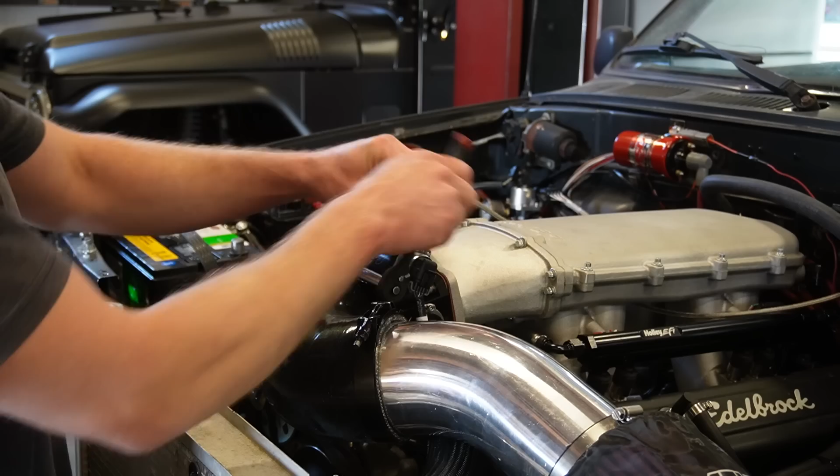Well, I'll show you the leaks. I guess I kind of wiped it up, but right along here, there's the main coolant passage that crosses over, and I'm thinking it's coming from the threads up and out in between the gasket here. So what I'm going to do is seal, actually I might seal all these up. These inner ones go into the center of the engine where there's oil, and those can leak as well. So I might just seal all the bolts up, but we're gonna have to do them one at a time because we don't want to loosen that gasket up at all. So we'll pull one out, clean it all, seal it all, and retorque it.

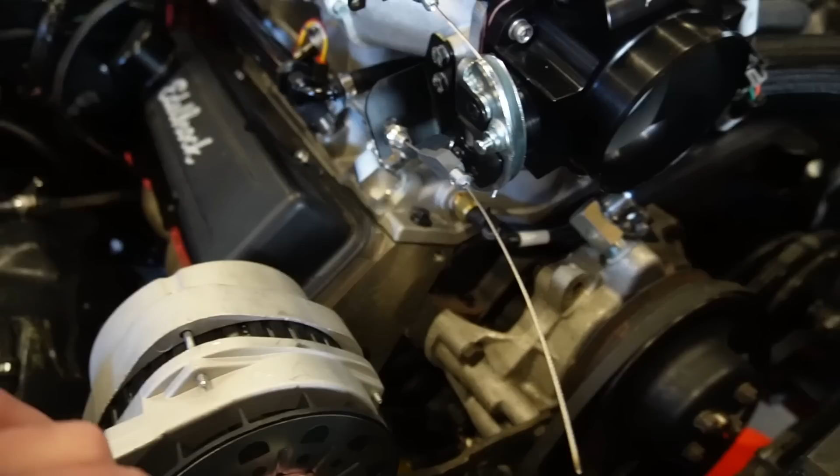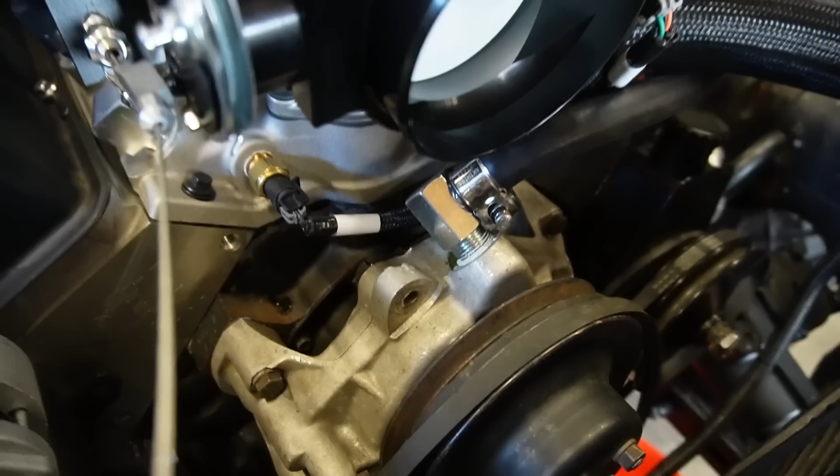And then the main problem I got to figure out is this 90 here is leaking, and I can't tighten it anymore. You can see I already had to notch out the back of the water pump just to get it there. If I do one more turn, I'm not sure I can really cut that enough. So I'm gonna have to find some way to get some sealant to hold on this 90. So we'll pull that out, clean that, reseal that up with something, maybe some thread tape or something, I don't know, to get that to seal up. And then we'll throw it all back together and see if that fixes our leaks.

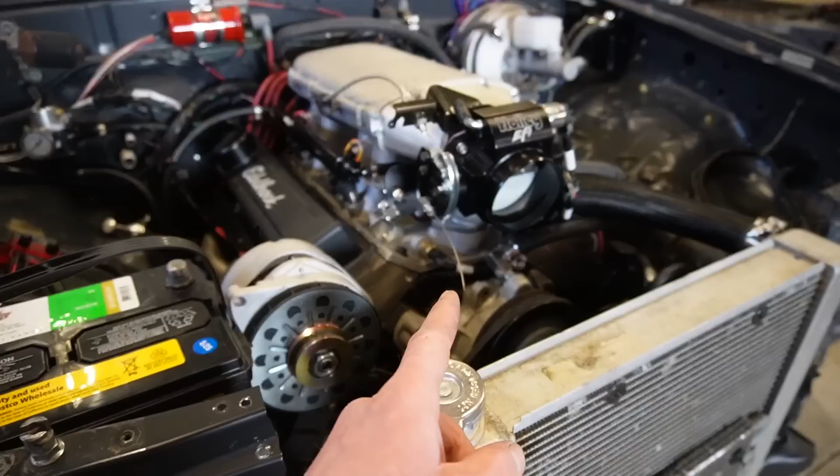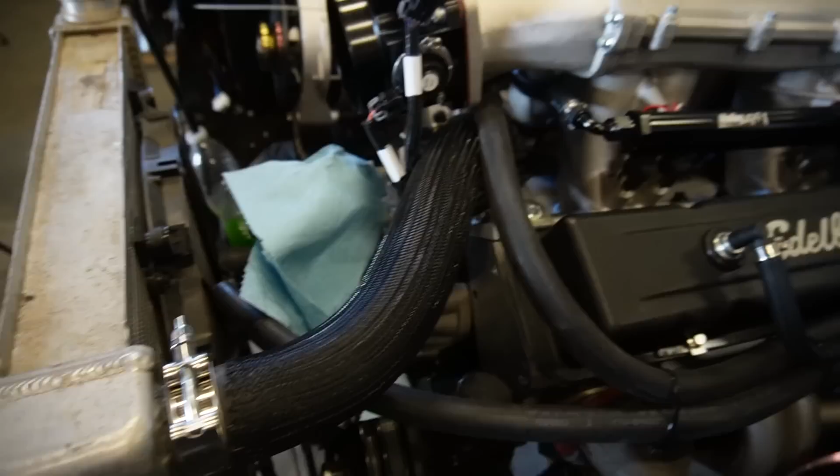All right, we got that fitting out. We're waiting for some new sealant. I'm checking these bolts, and these holes go all the way into the head, into the coolant passage. So I'm like 99% sure if we seal those up, that's gonna work, because when I pulled the bolt out, there was coolant on it. You can still see some of the coolant in the threads there. So I'm pretty dang sure that is our leak. So we'll seal those up and see if that'll work.

Well, I bought some other thread sealant that I'm going to try on these intake manifold bolts. I'm still waiting for that, so once that shows up, we'll get on that. What I want to do now is get started on mounting the radiator and building a battery box. I've had a ton of questions and requests about how I go about making parts. I basically go from cardboard to CAD, and then from CAD I cut it out on my plasma table. So I'm gonna show you guys exactly how I build my parts. Like I said, I start with cardboard, I get it as close as I can, and then I get it onto CAD, and then we'll get that on the plasma table, we'll cut it out, and usually it's pretty dang close.

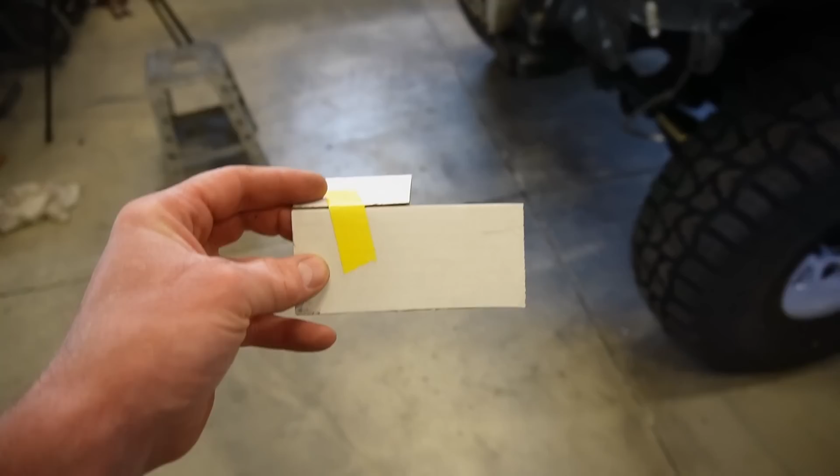So here's my pieces for the bottom mount. This is basically gonna go and bolt onto these bolts here. These are gonna double as my bumper mounts, but it's gonna be just perfectly fine to double that up. So that's gonna go there. We're gonna have a piece coming up.

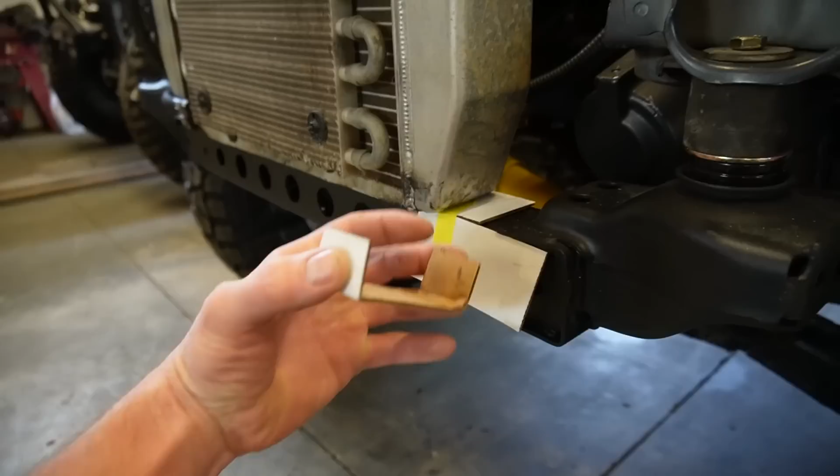We're gonna bend that, and then I'm just gonna make basically a U-strap, kind of like that, to go around the bottom of the radiator. I got some like 1/16 inch thick rubber that I'm gonna put inside there, so it's not rattling around metal to metal, but that's gonna kind of hold that like that.

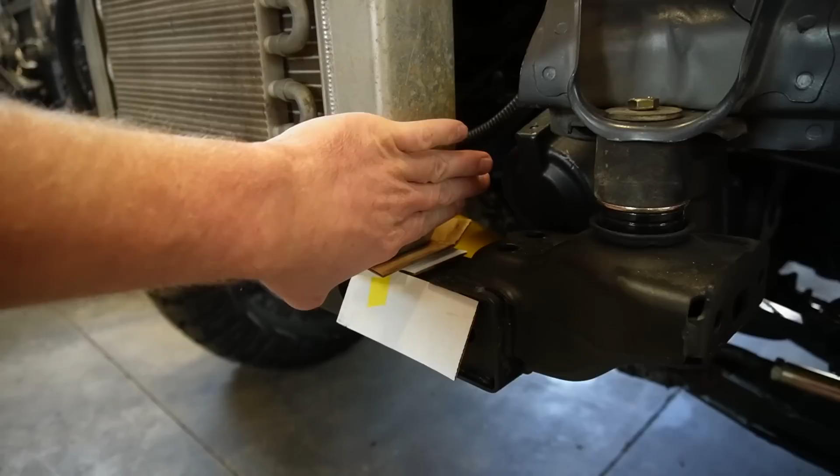And then I'm gonna plate up here, basically enclose all that so it kind of follows the contour of that radiator here. It is kind of angled down here, so we're going to follow that contour and kind of just close the end in.

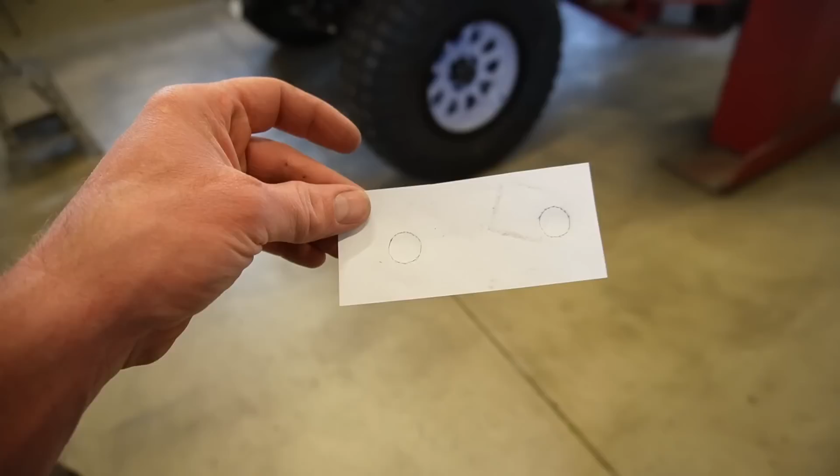What I like to use to get the bolt holes in the right location is I just use paper, and then you can take your fingernail and kind of run it into the hole, and then you can see it, and then I just mark that out with a little pen, and then I'll measure all that and get that into CAD.

All right, we got all this drawn up. That's the lower mount. That will bolt on to the frame like I said, and then that's the little strap. We'll bend that up at a 90 to kind of hold the radiator, and then that piece is going to close in the end, and then this is going to be the upper mount.

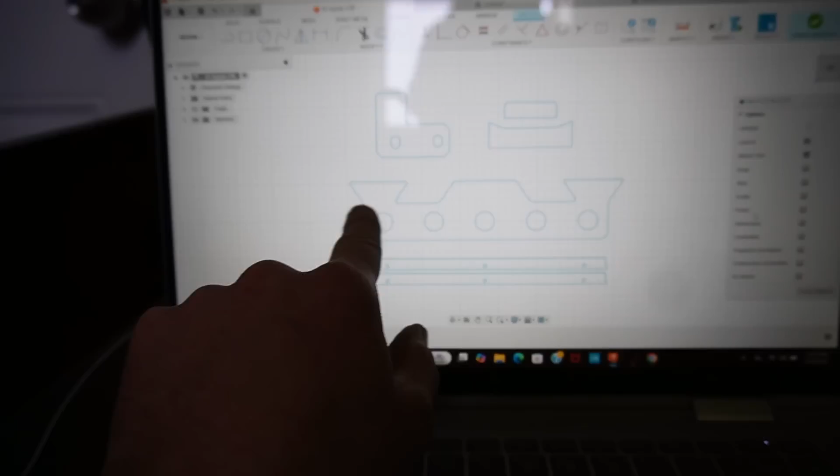So these two pieces here with the holes are going to weld to the bottom of this and bolt onto the radiator. This is going to sit on top of the radiator, and then I'll have a tube that runs here and then bends down to the core support. So this will act as a mount for the radiator, and it will complete that core support because it is cut for the radiator. And then I do have some holes in it. I'll probably throw some dimple dies in it, give it some strength and some looks. So that should work pretty good.

Now there are a few different ways you can get all this into CAD. What I like to do is just measure. You can take a picture of your part, get it into CAD, and then trace over it. I don't find that as accurate as just measuring, so I just measure everything by hand, and then it's usually pretty close that way.

So I'm gonna get all this cut out of, I'll probably go 14 gauge on this. It doesn't need to be thick, and then with that upper mount with the holes in it, doing dimple dies actually strengthens that steel quite a bit. So 14 gauge is gonna be plenty for that.

So we'll get all that cut, and then I do still have the file for the battery box I built for the FJ40. It's the same size battery, so I'm just gonna copy that box because it turned out really good. So I'm gonna copy that. I'm gonna cut that out. I think I did that at 1/8 inch. We'll cut that out, get that all bent up and welded together, and then we can get it mounted up to the truck.

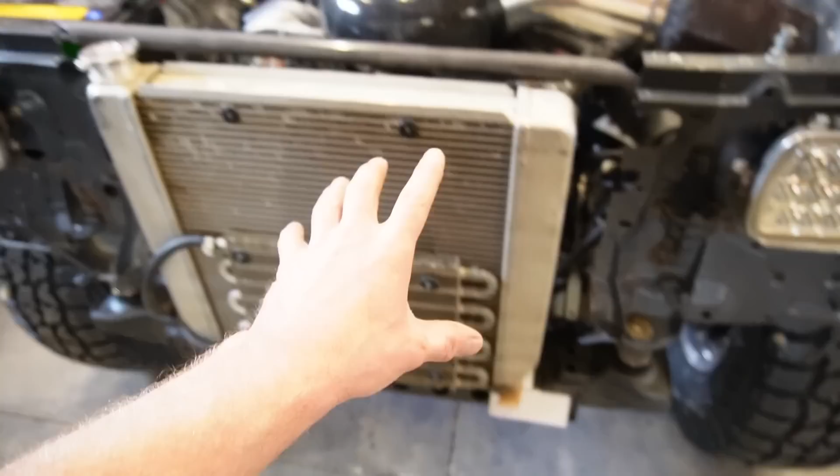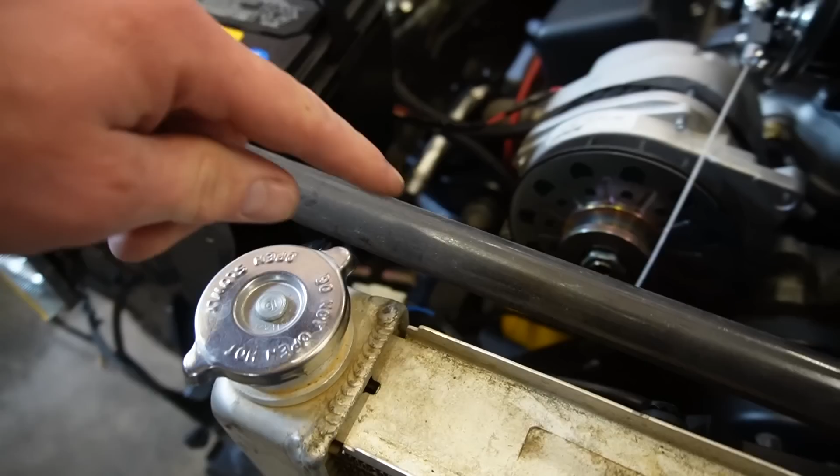All right, instead of cutting all this stuff first, what I think I need to do is bend this tube, because I got 1-inch tube here, and we're gonna have to run it kind of right there, but you can see it's gonna hit the radiator cap. So what I need to do is kind of put a bend around that radiator cap and that little nipple there for the overflow. So I'm gonna bend this first and see where it lands and where it clears, and then I'll have to do my measuring for that top plate here.

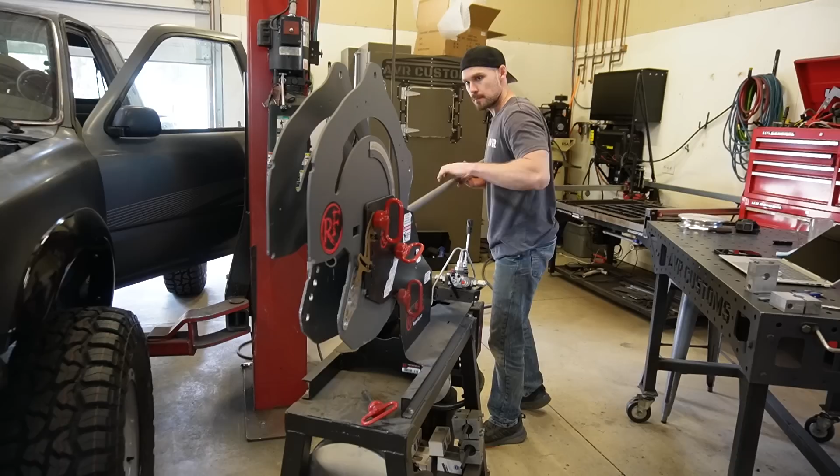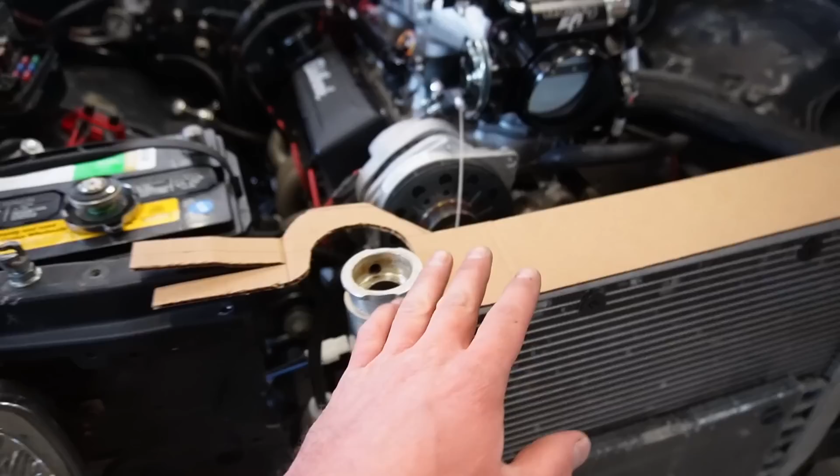Well, I decided to scratch the tube idea. I couldn't get these two bends close enough to where I could still have a plate like right here on this edge that looks good. So I decided I'm just gonna do a plate top. So it's gonna be kind of like that, and then it's gonna bend up, bolt in there, and then I'll fill that little gap in there, and then weld on the mounts off the bottom here to bolt it to the radiator, and then we'll cut those lower mounts and we'll see how it all works out. I think it'll work this way.

All right, after lots of measuring, I got the CAD file ready to go. So we'll get that ready. We'll throw on some 14 gauge on the plasma table, cut it out, and see how it looks.

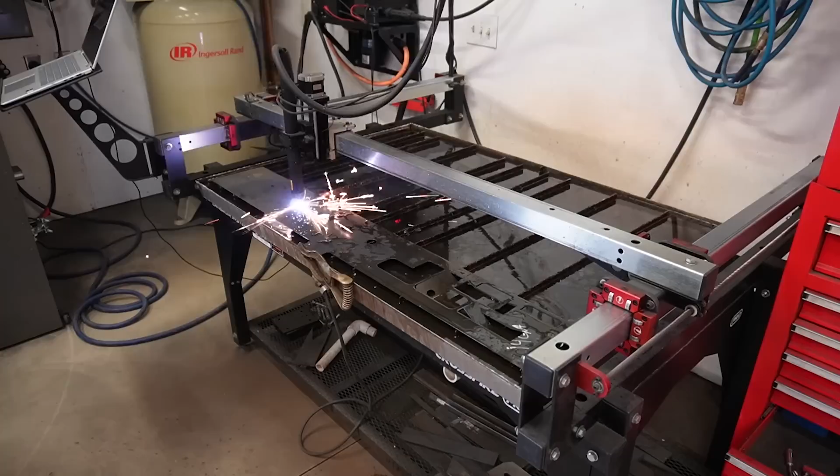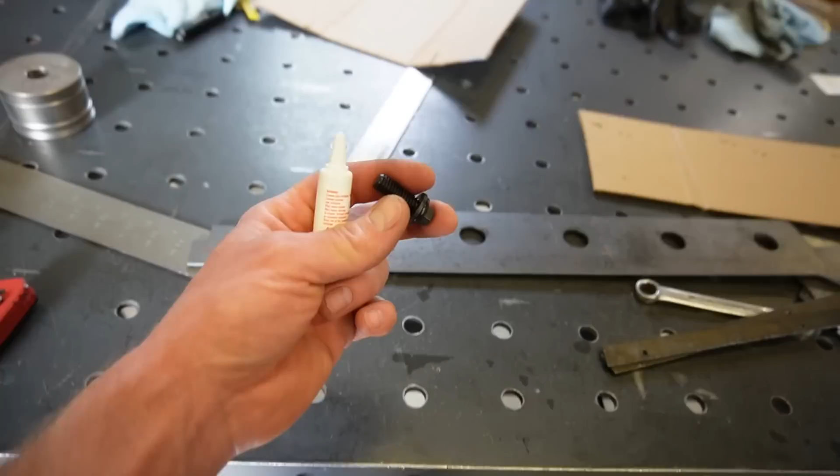Well, we got our parts cut, but we just got our thread sealant in. I'm gonna try this high temp from Permatex. It's the 59214. So we'll get some on these bolts. Like I said, I think I'm just gonna seal all the intake bolts, because I think the back ones are actually okay, but these middle ones I know go into the oil galley in the middle of the engine.

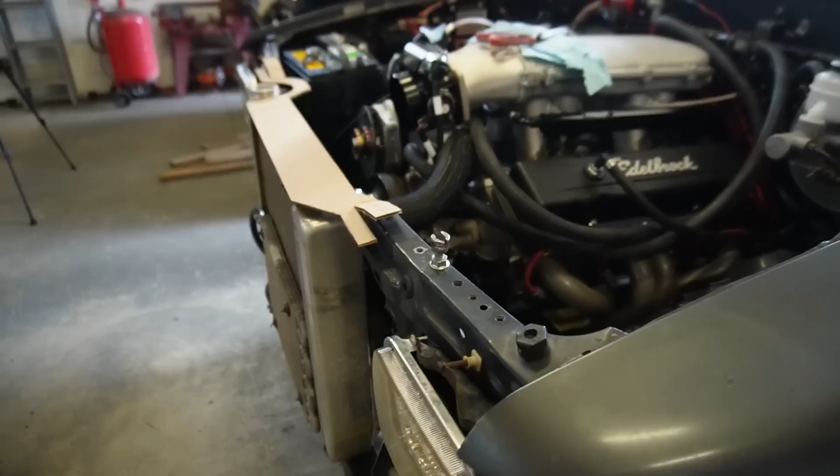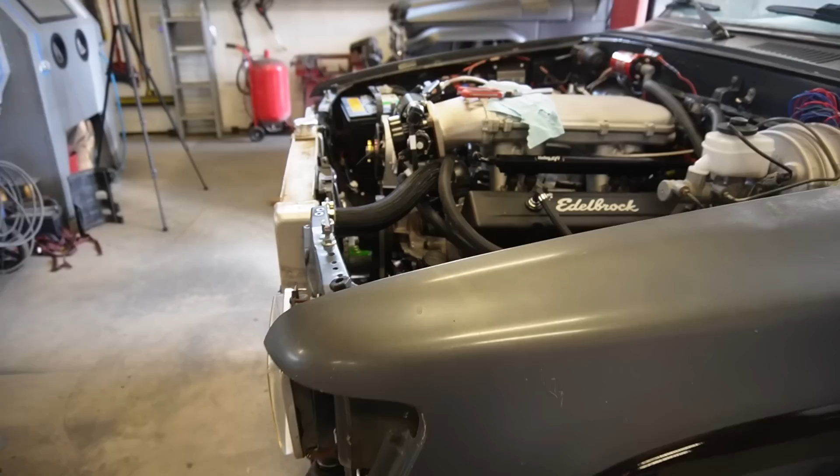So let's seal these up, and we got this already sealed up right there. I just did thread tape for now. I think that'll work. If not, we'll throw some of that on it, but let's get this all sealed up. Well, we're all sealed up. Now these bolts were completely covered in coolant, so I'm pretty dang positive that's where the leak was coming from. So either way, we're good to go there.

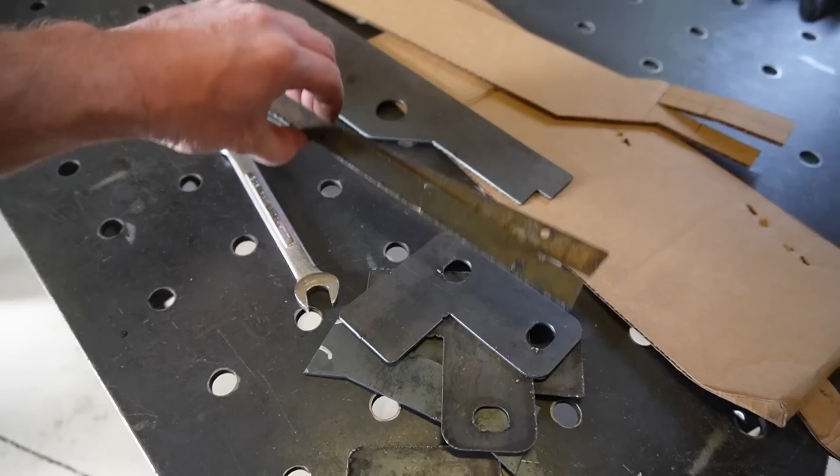Let's jump on these mounts. I'm gonna start with the lower, kind of get that lower set where we want it. And then this is the upper piece. Turned out pretty sweet. I think it'll look good once we do our dimple dies in these holes. And then like I said, these are gonna weld on underneath, and we're gonna use those holes to bolt it to the radiator right there. So that should work pretty good.

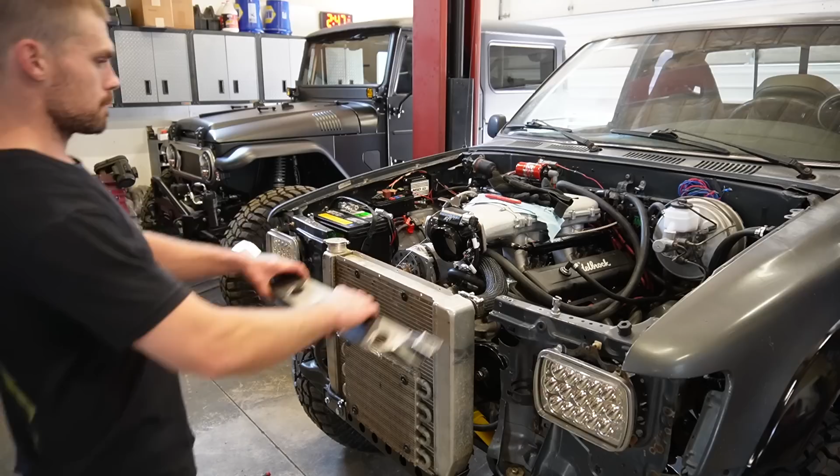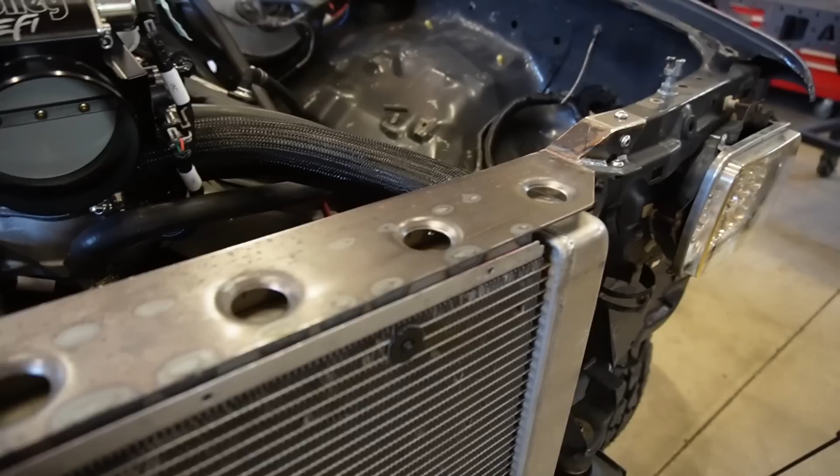Well, that actually turned out better than I thought. I actually think it looks better than if I were to go tube. I don't know, I like it, especially with the dimple dies and then how I tied it in here. I still got to trim it. It's sticking out a little bit here. I'll just bevel that down a little bit, but we are good to go.

These mounts, uppers and lowers, turned out perfect. And this upper really serves as 3 functions. It completes the core support, it's a radiator mount, and it looks good. So I'm stoked with it.

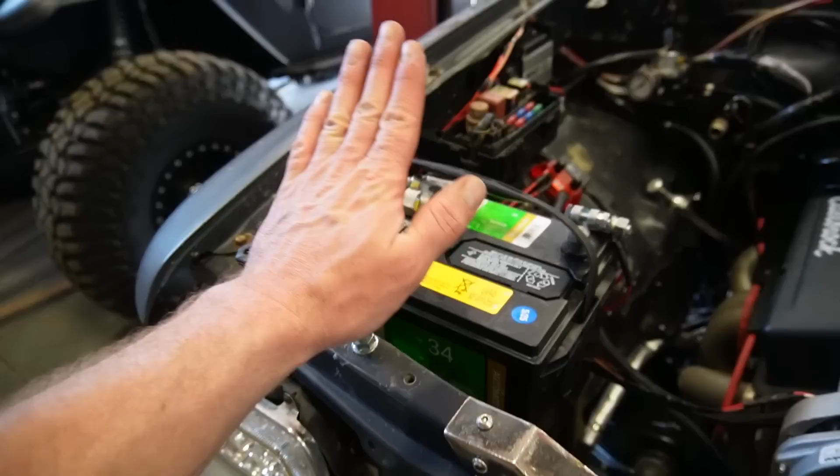Next, let's do battery box. So like I said, I already got the file on my computer for the battery box we built for the 40. Let's just copy that one. We'll bolt it right in. It should be pretty easy to get that set up.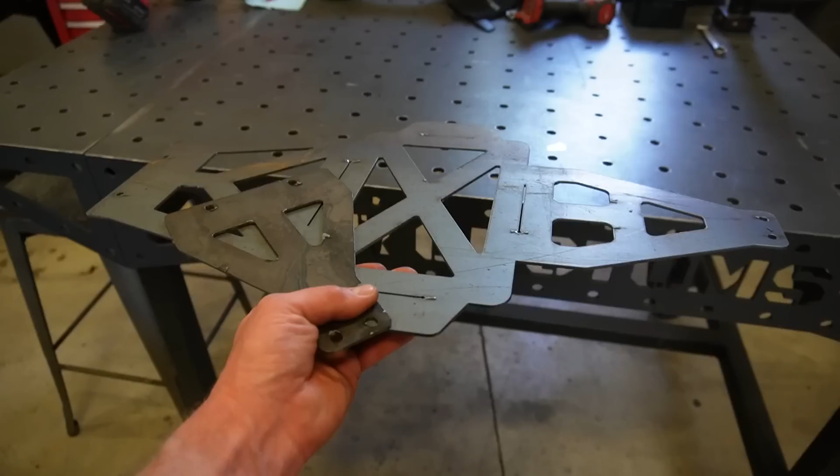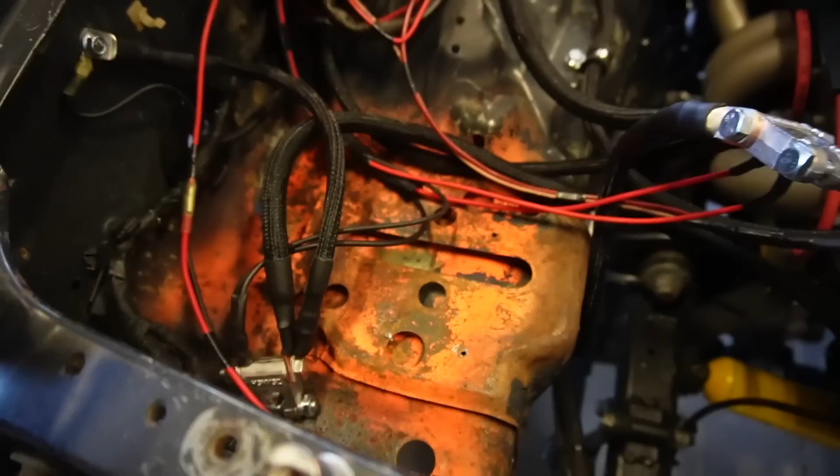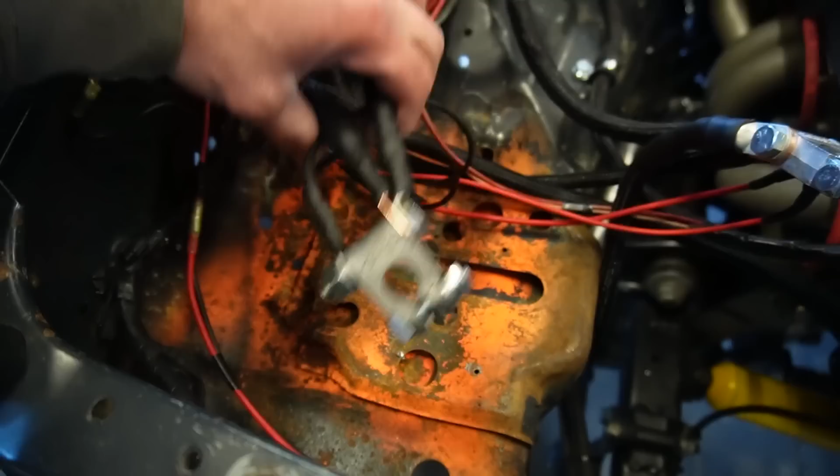Well, battery box is good to go. That turned out really nice. Now, I was just gonna kind of bolt it to the top of this old battery bottom tray thing, but my OCD got the best of me. It's a little rusted out, so I'm just gonna cut that thing out of there. Just a few spot welds, it's pretty easy, and then we'll be much better off, I think, without all that rust in there, and we'll just bolt that straight through the inner fender there, and we'll be set.

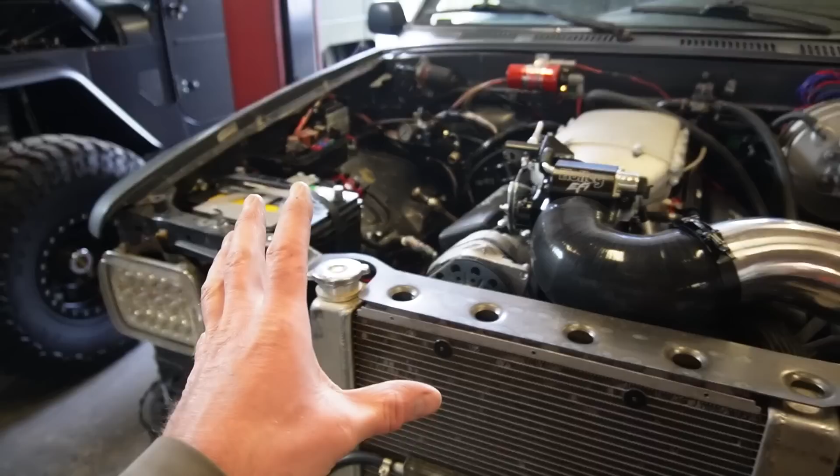Well, battery box is in, bolted in nice and snug. That is gonna work so perfect. So I'm trying to get everything done that we need to powder coat. And one other thing I want to do is I want to extend this intake out to get my filter more in this inner fender. And I think that'll just keep it away from the heat for one. And for two, it'll look a lot better.

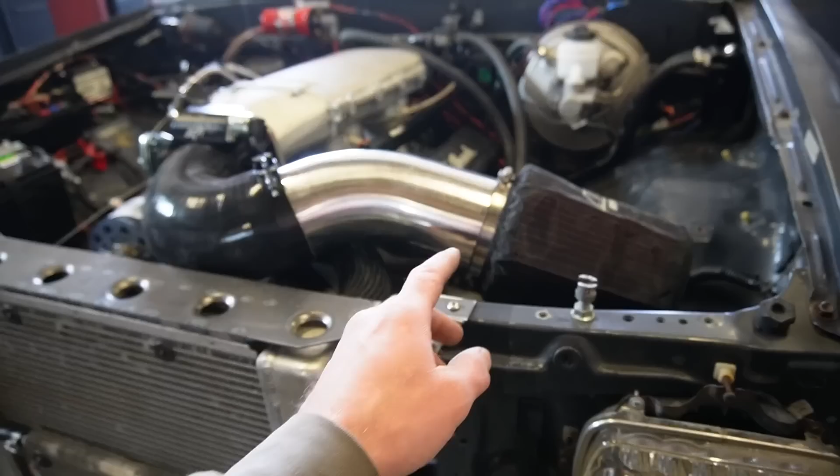So I got some more 4-inch straight. And hopefully we can get a decent weld on there. The rest of that welded pretty good, but I'm really not very good at welding aluminum. So we'll see how it goes, but I want to extend that out, and then we got to powder coat that intake pipe, the whole battery box. I think I'm gonna leave this and paint it the same color as the engine bay. That way it matches the whole core support, but these bottom mounts here can get powder coated black.

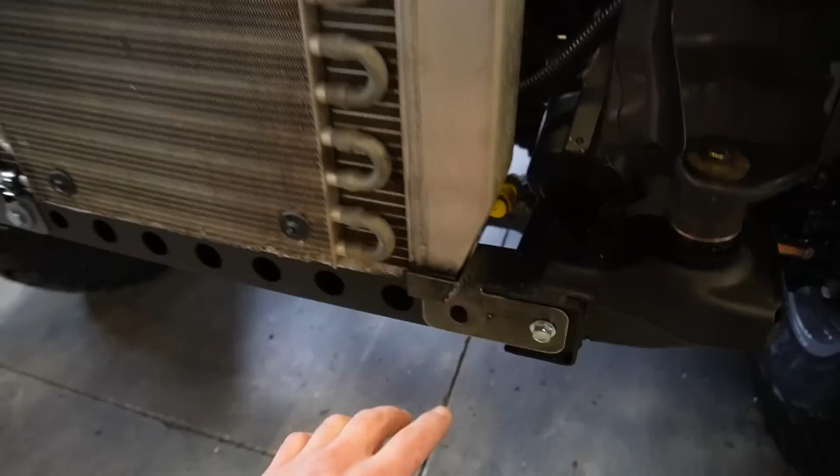And then I think there was a couple other things. Oh yeah, this bracket for the regulator needs to be powder coated, and maybe a couple other little things that we can powder coat. We'll do all that black and it'll look much better.

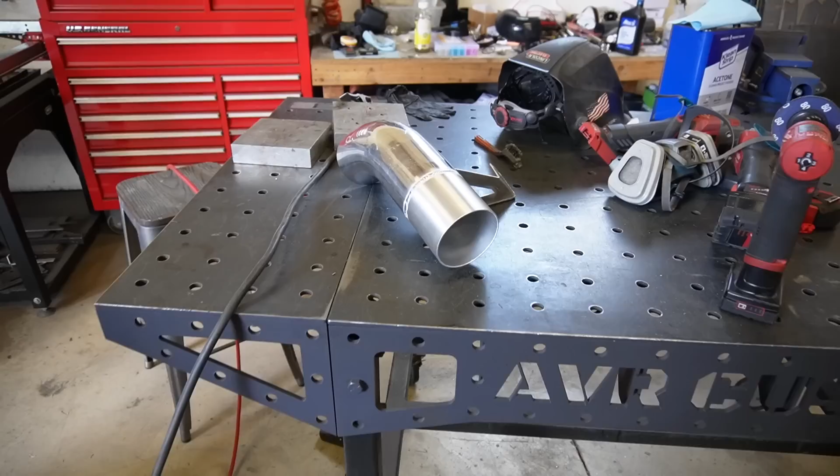Well, I don't know what's gotten into me, guys. I have struggled with aluminum every time I've ever welded in my life, and this one turned out, I mean, some of you probably don't think it looks that good, but I think it looks freaking amazing compared to what it usually looks like. It was effortless. It just, I don't know, it just welded. So we're good on intake there.

Now I'm gonna jump on some powder coat. So like I said, battery box, that intake, regulator mount, radiator mounts, and a couple other little things we got to powder coat.

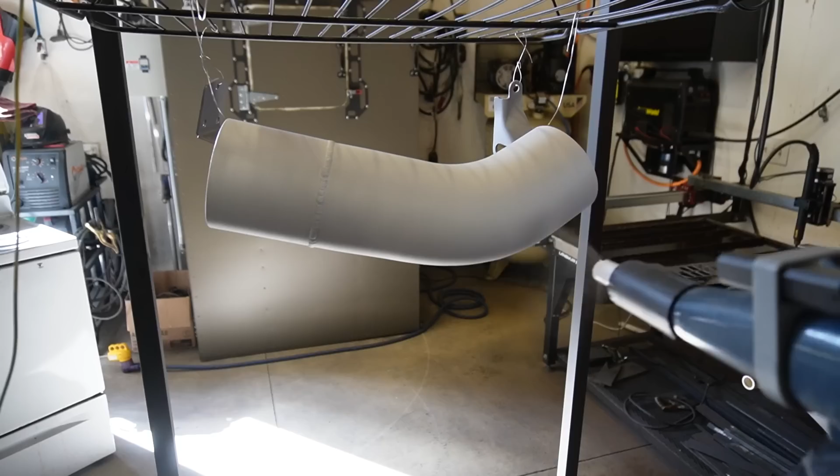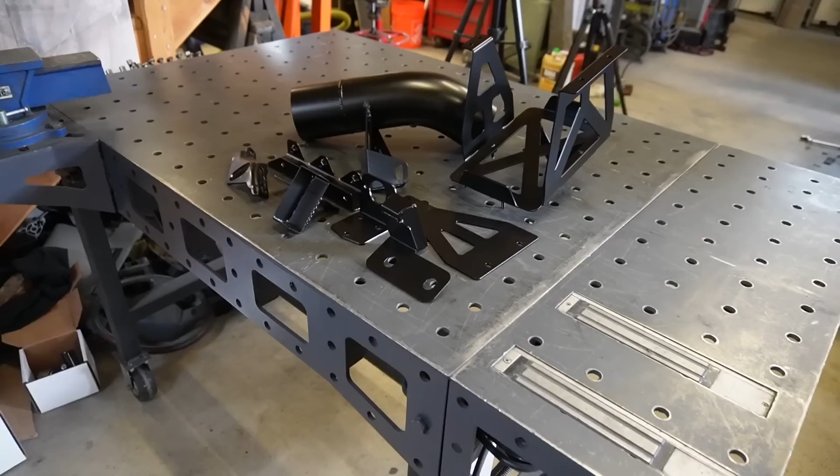Well, we're all done powder coating. These parts, like always, turned out really good. This is the stone black that I've been really using a lot lately from Prismatic Powders.

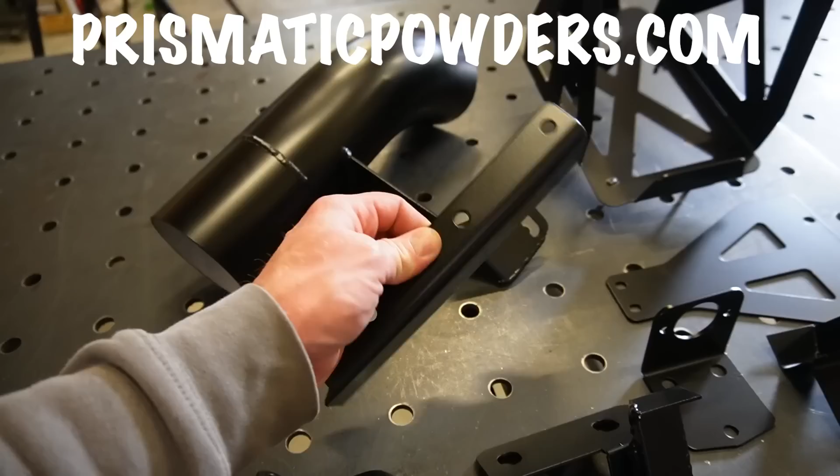Like I said, the stone black, it's kind of a matte black color. I mean, it's a really nice color. It's honestly one of my favorite powders. That's why I keep using it. But either way, we're good to go there.

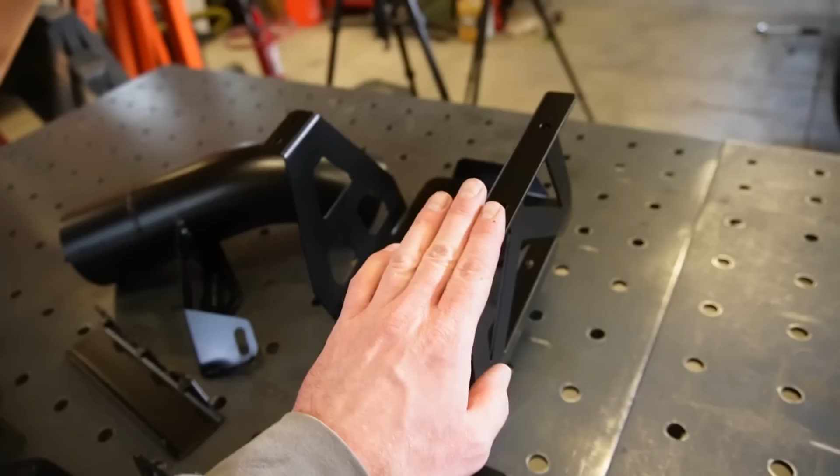Let's get all this stuff back installed on the truck, and then let's figure out what we got to do next to get this thing driving. I know the steering is all loose and disconnected. We got to do drive lines, which I have a set of new drive lines over there, and then we got to put the belts back on and get some of this stuff in the engine bay back buttoned up.

And then we got differentials, front and rear, transfer case to fill up with fluid. One thing I do want to do to the rear is pull the overload leaf off of the 63-inch Chevys. It does have the overload in it still right there. That'll probably drop me about a 1/2 inch, and then I also do need to swap those U-bolts out because those are just some cheapos that were in there.

I do have some nice new U-bolts right here that we need to throw in, so we got to throw the U-bolts in and we'll pull that overload at the same time, and it should level this thing out a little bit. You can see the back is just a little bit higher than the front, so dropping that back down, I think it'll look a lot better.

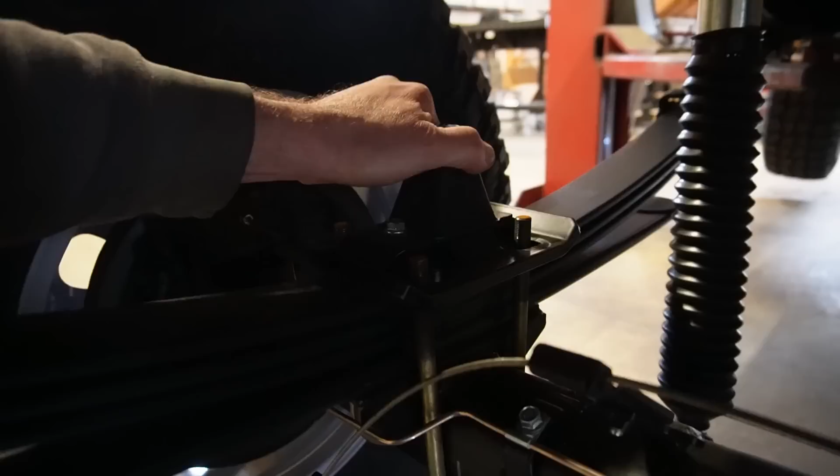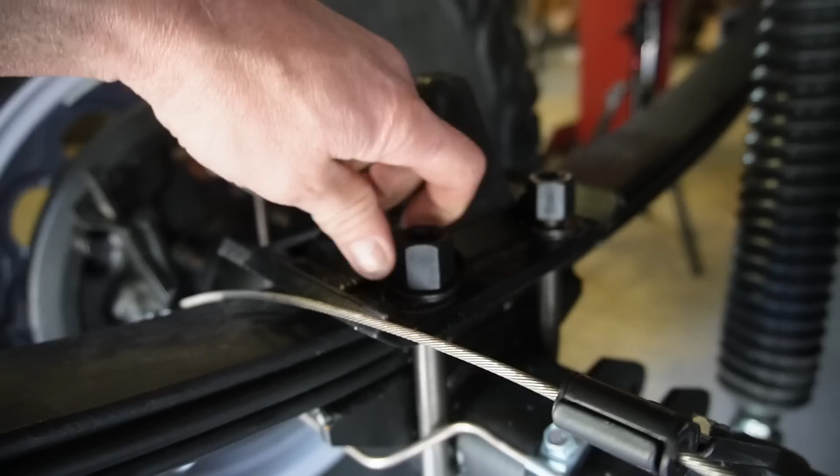Well, overloads are out and our new U-bolts are in. That is all much better now. I haven't put it on the ground yet, but those are about a 1/2 inch thick, or a little over a half, so it should level it out a little bit. It should look a little bit better, and we really don't need those overloads.

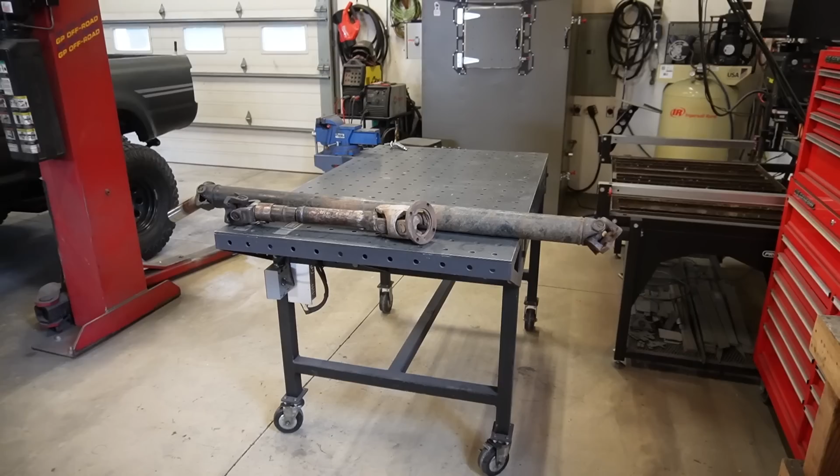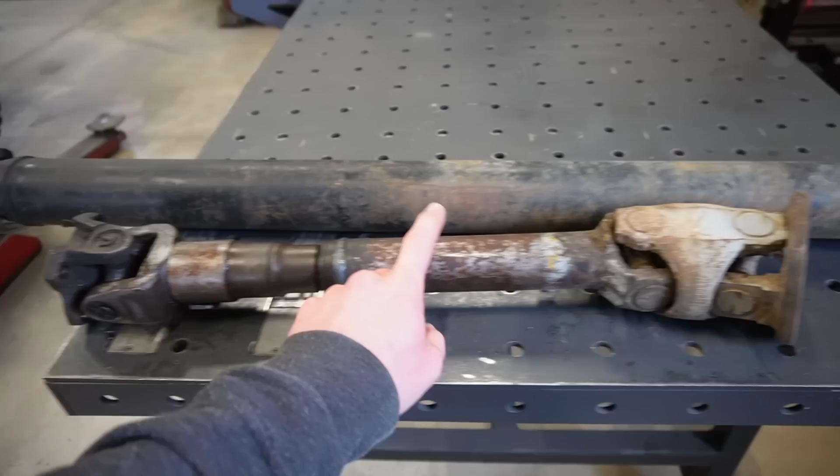Well, the next thing I want to work on is drive shafts for the truck. Now, since we moved the engine and transmission forward, we went about a 1/2 inch forward, which doesn't sound like much, but this rear drive shaft was already pretty short. You can see it was running about halfway up. We really should be running farther in, so we're gonna have to have the rear shaft lengthened. The front should be okay on length, but this cardan joint is completely shot.

So I'm gonna box these up and send them to Inland Empire Driveline, the same company that I had do the drive shafts on the FJ, and these things turned out perfect. They're amazing. So I'm just gonna send them off. I know they're gonna be done right. So we'll get those boxed up, sent out, and once we get them back, we'll check them out and throw them on the truck.

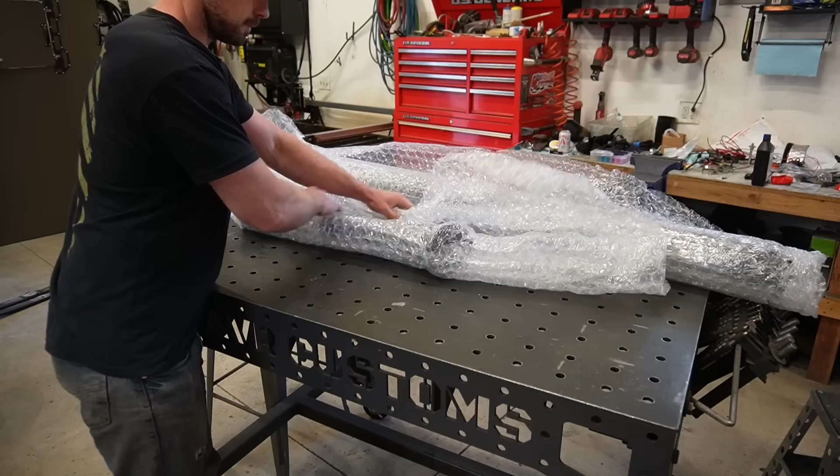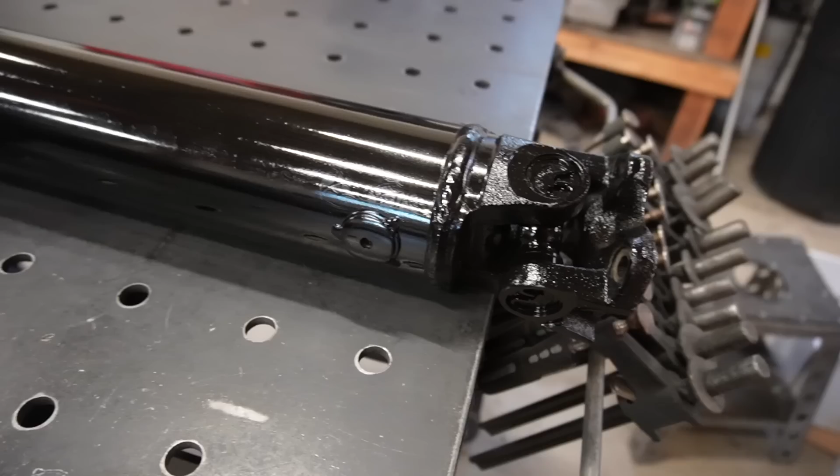Look at those puppies, those look brand new. So what I think he did on the rear shaft, there was a 3-inch tube before, now it's 3.5, so it should be a little bit stronger. And then obviously they're rebuilt with new joints, new double cardan up front, and they're all balanced and ready to go. So let's bolt these things on, make sure they fit. I gave them all the measurements, so they should be dialed in. Let's go bolt them on and see how they look.

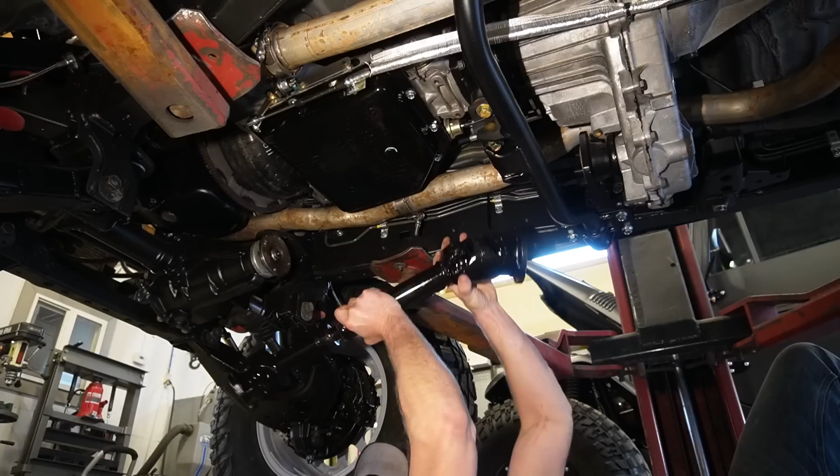Well, drive shafts are in, they're fitting so much better. Before with the old shaft and before I moved this engine forward, honestly it was too short. Like half of that slip yoke was out of the transmission, which honestly is not good. You want most of those splines engaged. So now it's much better, it should be a lot stronger. Anyway, let's drop this thing back down. I'm curious to see how it's gonna look without those overload leaves in. It should be a lot more level now.

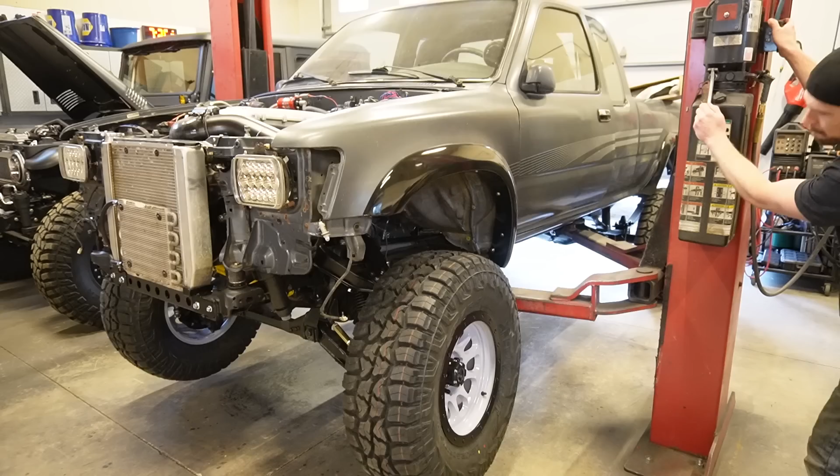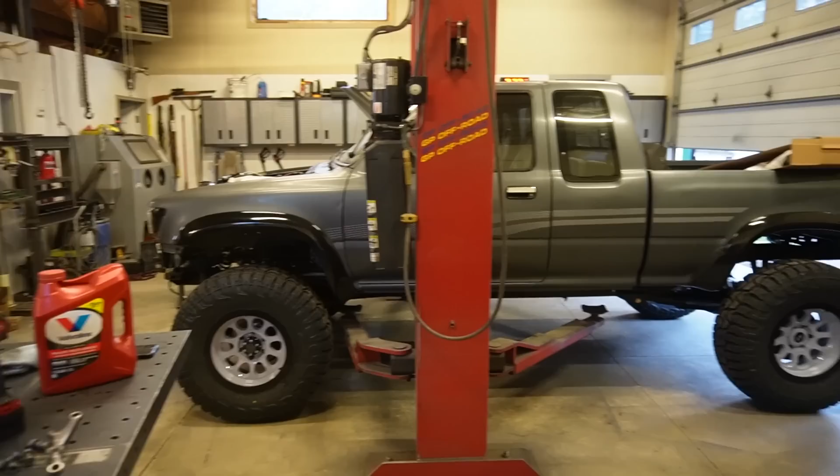Well, now we're sitting right. Honestly, it lowered it more than I thought it would. It looks perfect right now. It's kind of hard to tell with the lift in the way, but we are sitting actually really, really level. I like it. It looks much better without that back being so much higher than the front.

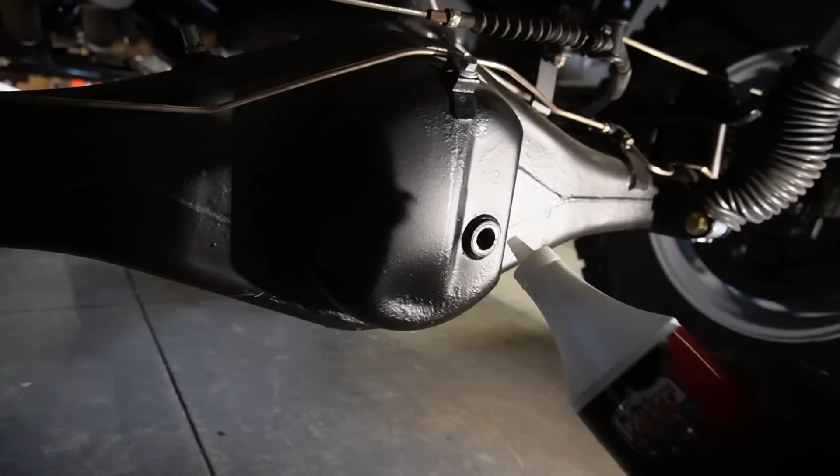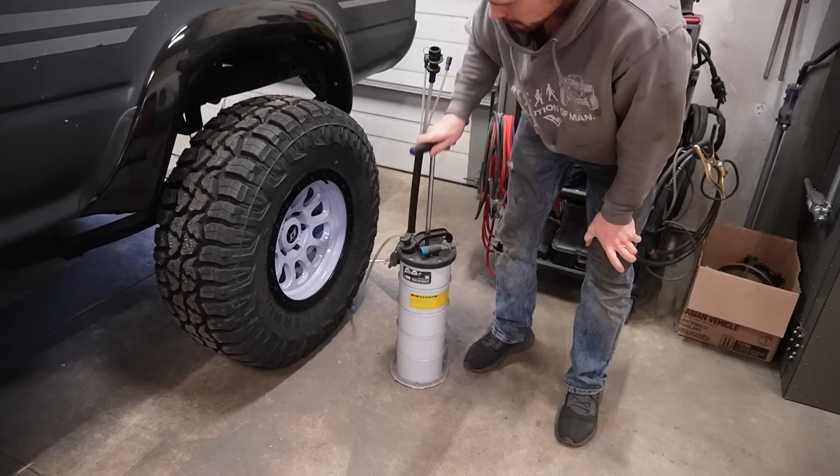We are ready to fire this thing up. One last thing I want to do.

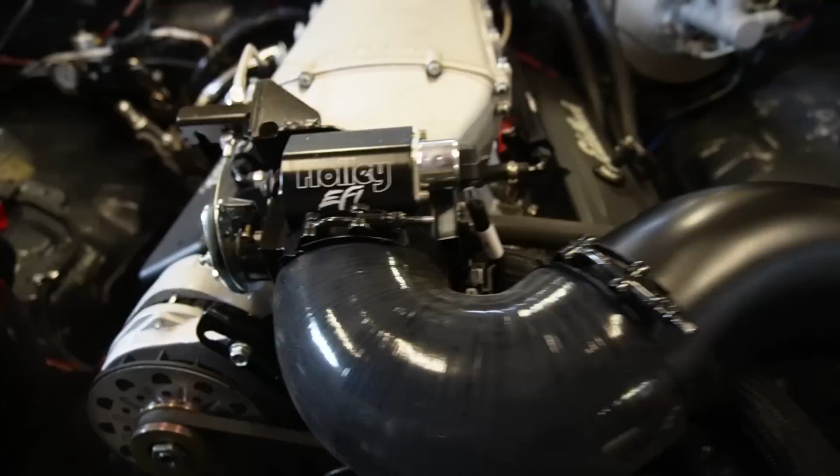Well, this side's a little suspect. It almost looks a little bit wet on that gasket. This side looks nice and dry, but our coolant plug right there on the head is leaking. So there's always something. Not a huge deal. I'll have to drain the coolant again, probably next time we're in the cooling system. It's just barely dripping out of there. So we should be good enough to drive it.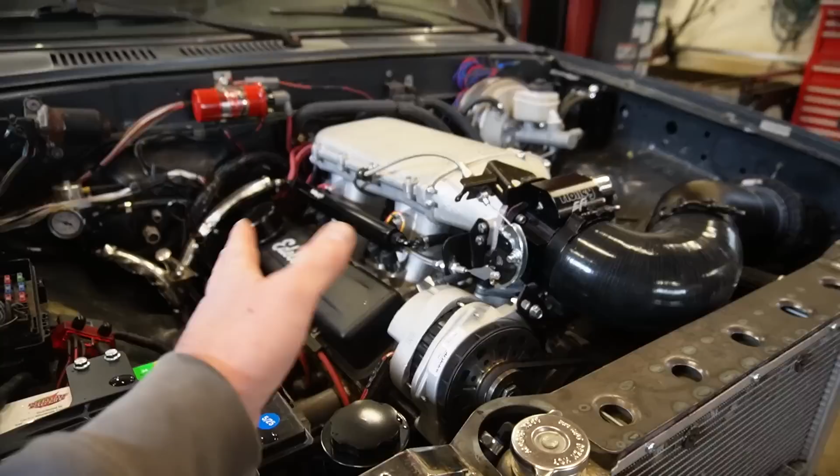So IAC might need some more adjustment, but it's running okay. I just want to get out and get some hours on it, get some miles on it to make sure that it's not just going to self-tune itself, because I keep messing with it and it's just going one way and then I go back the other way and I'm just chasing it. And that's kind of what the manual says. You just got to put some miles on it before you start messing too much with it. So that's the game plan. We got to drive this thing.

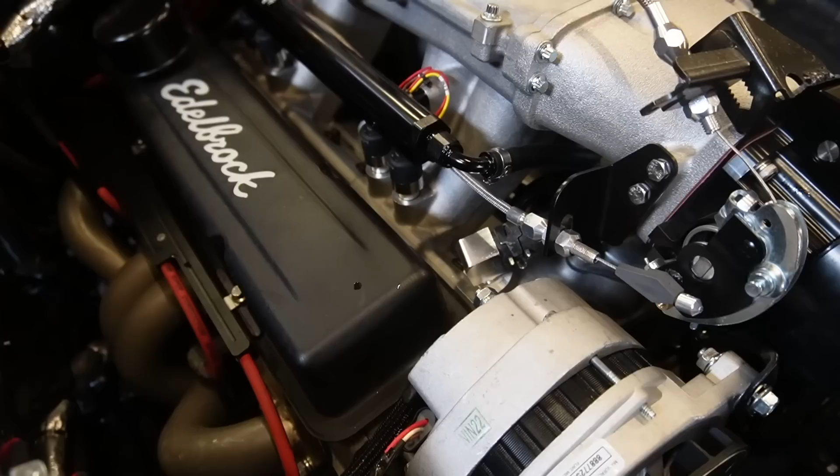Well, right after I put the camera down, I came back and looked, and we definitely got some coolant leaking on this side still. So I'm not sure if it's coming out of the bolt or that gasket. We may be pulling this freaking manifold back off, but either way, I think I'm still gonna go drive it and just see what it does. I don't know, pretty disappointing. I really don't want to pull that off, but we gotta fix our leaks. But either way, let's go drive it and see what it does.

All right guys, let's go for a quick rip. See how she's running. Whoa! We got rubbing, but we're moving. Seems to run a little better than before. Run around 7.

Them fender flares are rubbing pretty good though. Might need to do a little more trimming on those. Figured they would rub. We're going though, not bad.

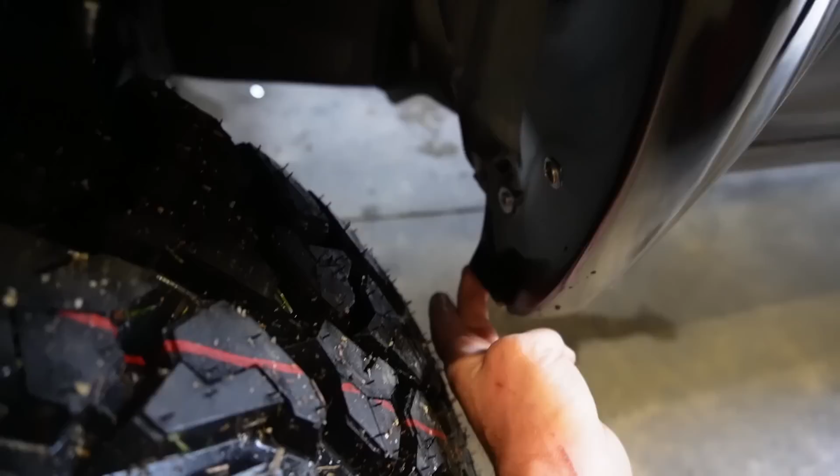Well, first drive was a success. The fender flares need more trimming, you can see. I already cracked that one, but I have good news for you. It looks like this, oh, it dried up already, but that bolt right there was leaking coolant. So I think it still may be those bolts. That sealant I used just didn't work, so we may have to try a different sealant.

I'm gonna keep plugging away at those bolts. I'm still pretty certain it's these bolts that are leaking. So one good thing though, that coolant outlet on the water pump is not leaking. Other than that, I don't really see any other leaks. I tightened that fitting up there and it quit leaking. So I think we just may need to reseal these bolts again with something different.

Well, I made the mistake of asking on Instagram what your favorite thread sealant is. I got like 98 different answers. This was kind of one of the common ones. It's a Loctite 592 thread sealant, high temperature, kind of the same thing that I already put on these bolts, but it seems to be not working. Maybe I didn't put enough.

I don't know. I waited 24 hours like I said, but either way, we're gonna try this on the passenger side bolts. The driver's side doesn't seem to be leaking, so I'm gonna leave those alone. We're gonna try this and see if this will work.

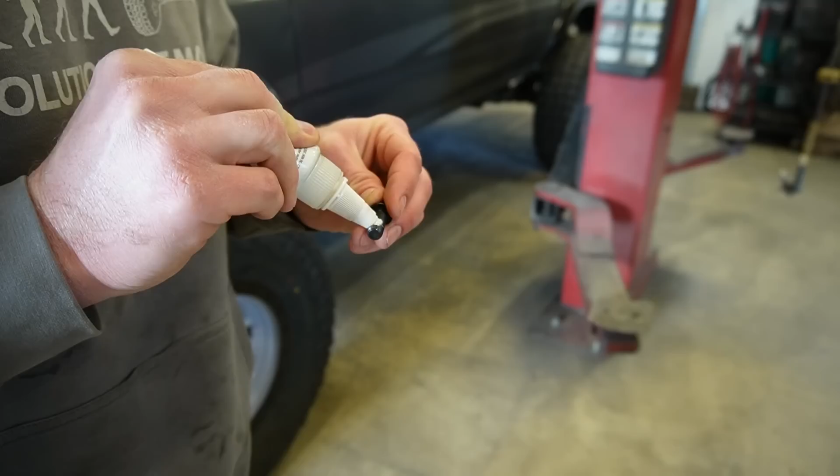All right, those bolts are sealed up. I'm really hoping that that is gonna actually seal it. I know for a fact one of those bolts was leaking. It started leaking externally on top of the manifold, like I said, so I know that bolt was leaking. But either way, we're gonna wait 24 hours for that to dry up and cure up, and then we'll fill it up with coolant and try it again.

Well, third time's the charm, right? Our intake bolts are sealed back up for a third time. Let's go try it out. Let's go drive it around. We only drove it for like 5 minutes last time, so I wanna drive it for a little bit more and see if this thing will tune itself in.

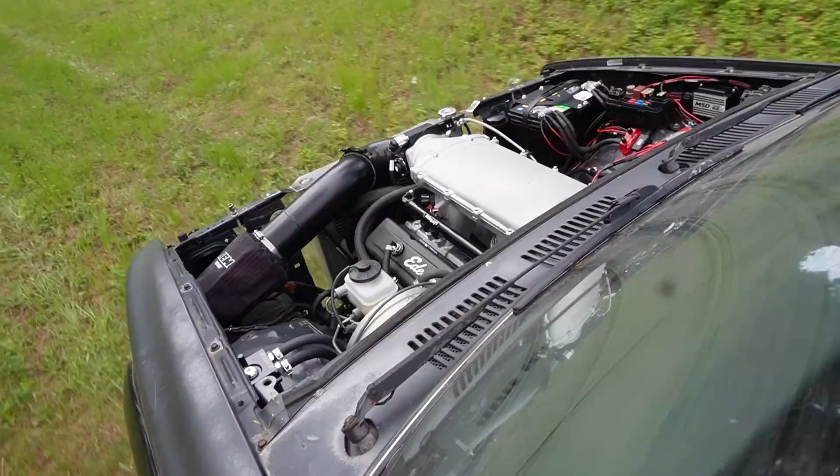Okay. I said don't touch. No touching. Cheese. Are you gonna go for a ride with Daddy? Yeah. All right. We gotta make sure that.

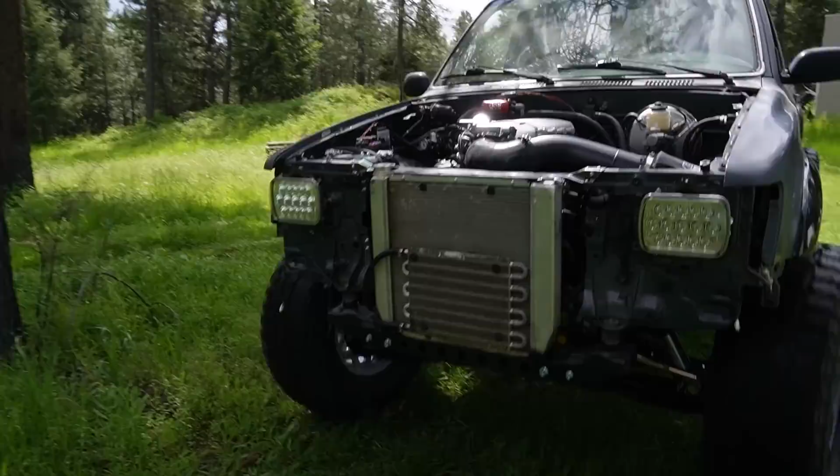Well guys, I don't want to speak too soon. We're up to temperature. We've been at temp for probably 10 minutes and I don't see any leaks. My fan is running, just keep it cool, but I don't see any leaks on the intake manifold. So I think that sealant we used, like I said, third time's the charm. That last sealant seemed to do the trick, and I did put a little bit more on. Maybe I just wasn't putting enough on at first.

But either way, we're running all right. I think we just need to drive it and put some miles on it and get this Terminator X kit kind of self-tuning itself. And I mean, it's running pretty good once it's up and running. The issue I'm having so far is it's kind of hard to start. It takes a long crank and you got to have your foot on the throttle or it will just kind of sputter and it won't really start.

So I think that has a lot to do with the IAC, because that's acting a little bit funny. It'll open and close and it'll kind of just do some weird stuff. I think it's just trying to learn. But either way, we're up and running, we're driving, and I did trim those fender flares a little bit more so we're not rubbing anymore. We're on to something. This thing is turning out pretty sweet.

Well, anyways, guys, I'm gonna wrap this one up here. We got some exciting stuff coming next. We got to jump on the interior again. Now, we already did seats and center console and a few other little things, but we need to figure out the instrument cluster, all the gauges. I want to go through and clean everything up, pull the carpet out, pressure wash that, just go through it and tidy up all the interior.

And then I'm kind of stressed about the bodywork because it's going to take quite a bit of bodywork. I mean, the cab itself isn't bad, but the bed is just wavy all the way down. It's going to take quite a bit of work to straighten out, but either way, I'm excited for it, a little stressed out about it, but I think it's going to look so good with a nice fresh paint job.